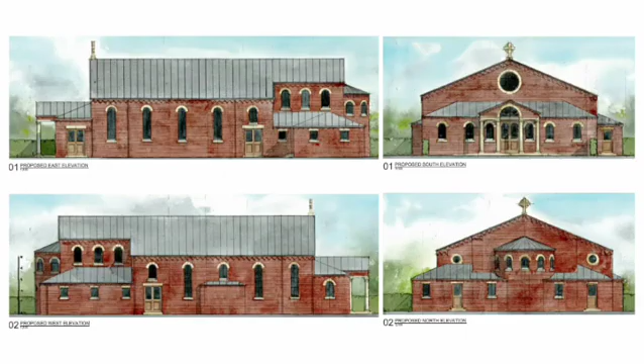Okay, thank you, Father. So I'll start probably with what you all want to know a bit more about, which is what is it that we're actually going to be building. As Father said, we've just got planning permission, so we've spent the last year talking about the options we've got. So what is it that we've arrived at in terms of a decision, and what have we got planning approval for?

You will have seen some images around the place, on websites, and here I think there's some images over there and over there of what we're going to build. But essentially, this is what we've got planning permission for.

A Romanesque church. Essentially, for those who don't know, this field out here is where all this is going to go. So the view you will see from where we're sitting now will essentially be the front face of the church. From the school buildings, so the classrooms and the dormitories, this is the elevation you'll see on the Harts Lane side, and then the rear of the church, which will overlook new car parking at the bottom right there.

The style has been chosen for a number of different reasons, sort of costing-wise. Obviously, we'd love to have gone with a Gothic, very English-style church, but that has cost implications which we weren't able to stretch to. Also, we have to demonstrate we're blending in with existing buildings. Although the brick we'll be going with is unlikely to be exactly the same as the buildings we're in and the buildings adjacent to us, red brick was something we had to use to incorporate with surrounding buildings.

And then we're going with a zinc roof, which is actually a relatively traditional material, so a grey sort of low roof. And then some decorative features around the windows and where the roof meets the walls as well. So a mix between functional, cost-effective, but with some beauty thrown into it as well.

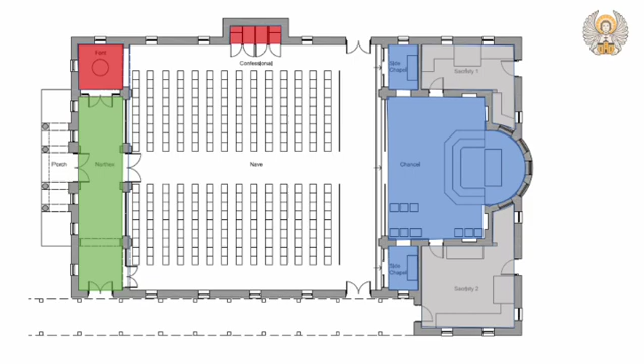And then a narthex, or cry room, as it's more usually referenced to. This will have glazing at the front, so that when you're in there, you have a really good view still of the sanctuary during Mass. It'll be soundproofed when the doors are closed, and obviously we have speakers in there, so you can still hear sermons and things like that.

But yeah, that should be a good space. I think the intention as well is that this shelving and cases are in this space for the repository location, things like that.

And then the nave, so where we'll all be sitting for Mass. Capacity-wise, we're looking at, depending on what's reasonable. It's interesting, you know, when you're thinking about this, you watch how many people squeeze into pews. I think the maximum I've seen is 8 in a pew of 3 meters, so it's quite impressive.

Hopefully we won't have to be squeezing into the pews quite as much, but if we did, we could potentially have a capacity of up to 320 people in just the nave, but more comfortably, it's more realistic that we're looking at a 250 people space. Our current one just references about 150, so we're about 100 more comfortably, but potentially doubling our space if we need to for busy times, confirmations, end of year and things like that.

And then finally, the choir loft. So we will have a choir loft that will sit above there. If you put seating in it, it would cater for about another 30 people, but obviously most of the time it will be used by the choir.

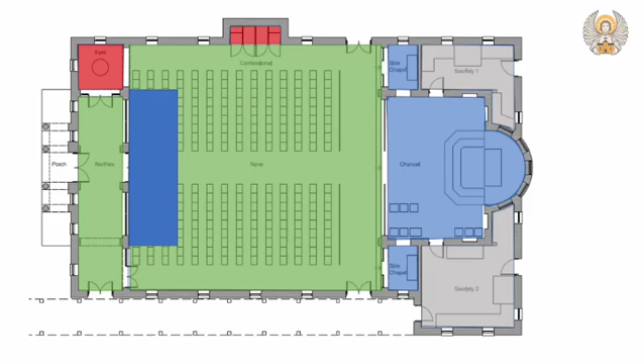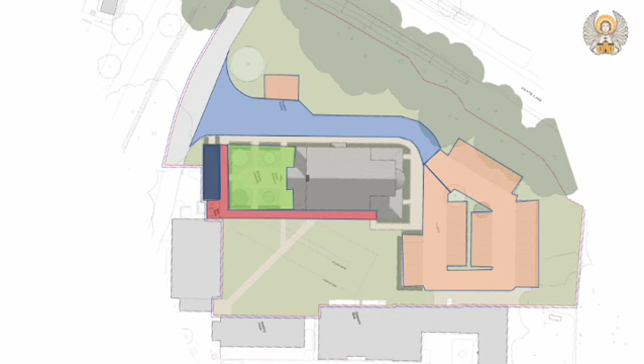And then we will have a nice formal garden in the front. And that won't just get forgotten about because it's a planning condition, so it will go in. We had to demonstrate biodiversity net gain for planning purposes. So that basically means any grass we were digging up, any trees we were taking out to develop this, we had to basically reinstate to improve the area.

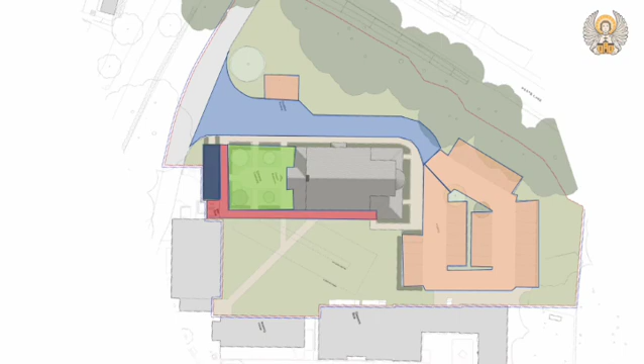So that's included a lot of native species of fruit trees and things that will go in there, and some other planting that will go around, hedgerows and things. So it will be a nice landscaped area as well as the buildings themselves. So that's what we've got at the moment. But how did we end up there?

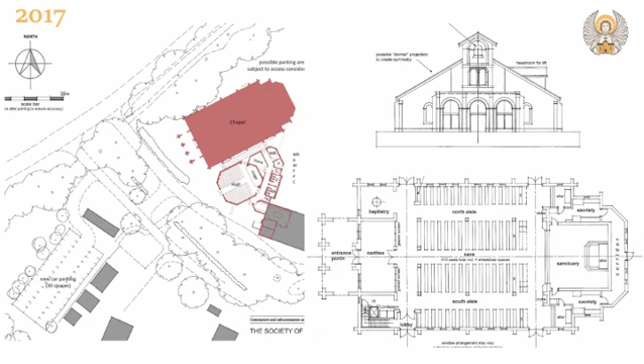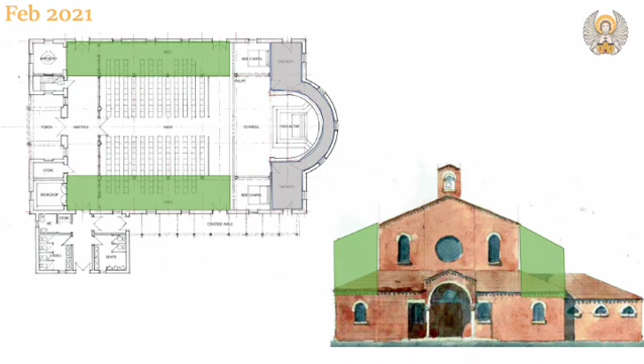By May last year they made those adjustments—you can see now a single pitch roof and a much larger sacristy. They were still trying to push the link corridor, which again is really good design and very useful, but it was an expense we just couldn't afford at this time.

The other noticeably different thing here is the toilets. I mentioned the toilets aren't in this location in the scheme we've gone to planning with. We would have loved the toilets there, but because of its location, the toilet block essentially becomes part of the church's elevation—from this side, it's part of what you see as the church. So it had to be in keeping, the same materials, the same roof, which for a toilet block meant it was quite a costly building, even though it's quite small.

So we said, if we move that building slightly further away from the church, we can make it much more simple, and it won't be as costly. So we got rid of that from that location. This is the scheme that we went for pre-application submission on.

For those who might not already know, before you submit the full application, you submit a tester - a bit of information to the local authority asking what they think our chances of getting planning permission are. So this is the scheme we did that with.

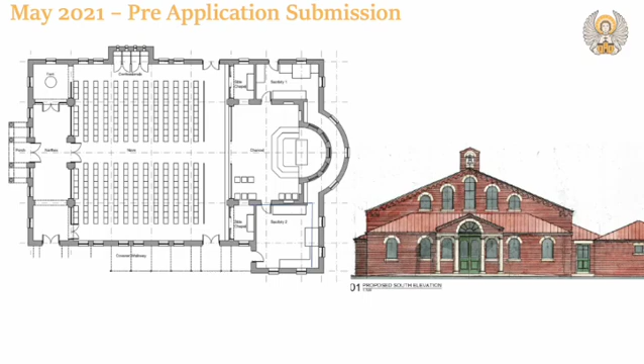We also, for those who are really local, you might have got some flyers through your door - we leafleted every house in the village to say, look, we're doing this, if you want to talk about it, come and speak to us. We also went to the parish council and had a meeting with them and presented our plans. In all cases, pretty much, it was well received.

I think the response from the local authority to the pre-app was, we consider this unlikely to cause harm, which is as close to 'go ahead' as you get from them, really. So that was good. They also gave us a heads up on the types of surveys they wanted to see from us in order to approve it. So that was a milestone back last year - it was a good bit of progress.

So then when we'd got our pre-app response, and had some good response locally, we were buoyed by that and excited - we wanted to kind of crack on. We still had money hanging over us, so the whole time we were doing these design iterations, we were getting prices checked on everything to see where it sits in terms of budget. At that particular point in the project, it was still over the amount of money we wanted to spend.

So this was our 6th iteration of the church, and as you can see, compared to the previous ones, it's a lot shorter. We were working at that time on a budget of £2 million for the whole thing. Through the pre-app we'd had identification from them about ecological things we had to do that were going to cost more money. So we said, right, what is it that we can build for that £2 million? This is basically what it was - a church that we could afford to spend £2 million on. It would have enabled us to squeeze just about 240 people in, but it would have been a squeeze.

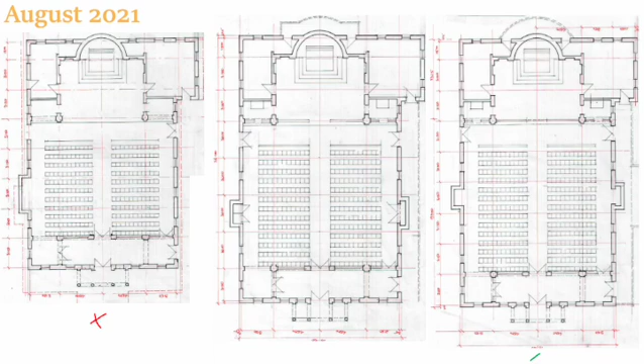You've probably seen these images on the website. We submitted the planning application in October. We were bracing ourselves - the architect and a lot of the consultants we were working with had horror stories of planning applications at schools taking 18 months. So we fully expected to be sitting on our thumbs for a while as we waited to hear back from them. But actually, we were really lucky.

I think all the prayers to St. Joseph and St. Philomena really paid off at this point, and we actually got planning approval in January. Now, we already knew pretty much before Christmas that we were going to get planning permission - we got a written response back from the planning officer basically saying he was going to recommend it for approval. So that was a really good way to go into Christmas, knowing that was coming.

I think we were really lucky. There was a brand new planning officer, so the guy actually deciding on this was brand new to the council, and I think he was quite keen to impress his boss. So he jumped on it very quickly and was very open in discussions with us about what he wanted to see, what he wanted to know.

But essentially, this is what we're building. You can see the car parking at the back, the new access road, the new toilet facilities, the walkway, and the nice trees in front. I don't think there'll be quite as many trees in front there, but that's the artistic rendering.

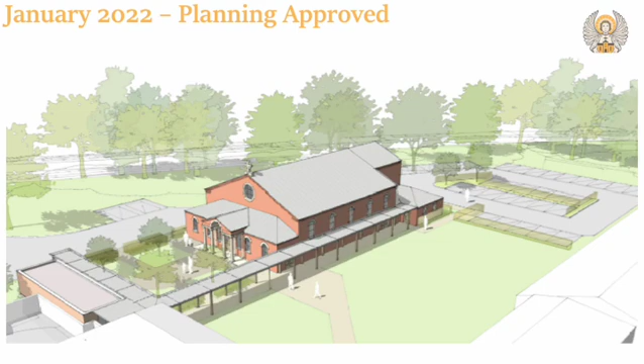So that's essentially where we are at the moment. Obviously those are just a few images, but there's a lot more that goes on behind the scenes, and I thought it'd be interesting to talk to you a little bit more about the architect we're working with, because he's a fascinating chap working within a great organisation.

As I mentioned before, we took on some designs that had been done in 2017. The company who did those designs had been bought out by another company, which is Morse Webb. We could have just carried on working with them, but we really wanted to make sure we were getting value for money, and we thought none of us - Father John and myself, and I don't think Father Robert either - had been involved in the project back in 2017.

Why these guys stood out is that they realised, whilst they had a lot of experience with schoolwork and a reasonable amount of experience working on old churches and restoration of churches, they hadn't done a project like this before - they'd never built a new church. So I think they have a pre-existing arrangement with a guy called Julian Bicknell, who does have a lot of experience with this type of project.

He's written 3 or 4 books about the history of church architecture. He's Anglican, not Catholic, but he immersed himself in everything to do with the traditional liturgy to understand how the church needed to function. So these are some examples - I think this is a church at either Cambridge or Oxford that he previously did. When we interviewed them, we were very, very impressed, and we thought this is the guy who's going to get this right for us.

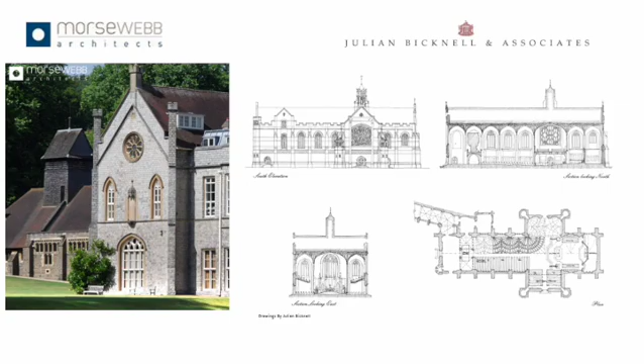These are just some of the images, to give you a flavour of some of the stuff that goes on in the background.

I mentioned his work in planning out the ceremony. You can probably just see that these are individual priests or servers, and there must be 500 of these little images planning out various different ceremonies, so he made sure it was all right.

And these are some of the images of him giving us ideas of how the roof would look. We're not going with that, by the way. It's going to be a much more traditional arrangement. But you can see the skill.

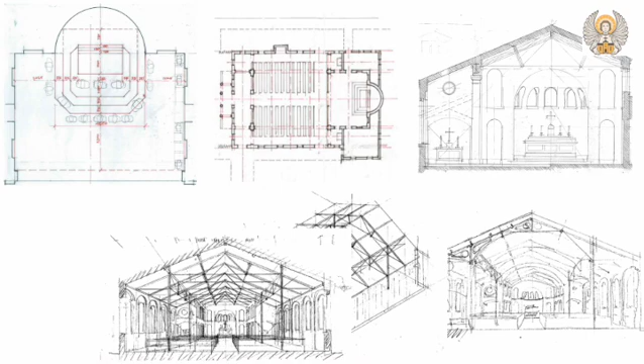These are all hand drawn, and these are some of the other options that he presented to us in terms of the way the interior of the church will work. Just a fantastic designer, so you've got the different choices.

So the one we've gone with is down below. But we also discussed columns throughout the church, shown top left, or a colonnade, an arcade form there. This would be right back at that first design when we had the aisles down either side. These columns and arches would have separated the aisle, which would have been absolutely fantastic.

But yeah, the cost was discussed between Father Robert and myself.

And I was lucky, I stayed both in France and then in America, visiting a lot of churches, some of them freshly built. So we were able to obtain their plans, in particular from Veneta. We got all the plans, all the footprint, from the church of Veneta, which was exceptionally well designed in terms of use.

So we based the design of the chancel, or the sanctuary, and the spacing between the altar, the steps, and then the far wall, on what we were experienced with in other churches.

And one thing about colonnades, they're fantastic, but you lose 10 spaces in your church, and it blocks a lot of line of sight, because that was an intention — and sound as well. Everywhere, from any point in the church, you'll be able to see what's going on in the sanctuary. So that was important.

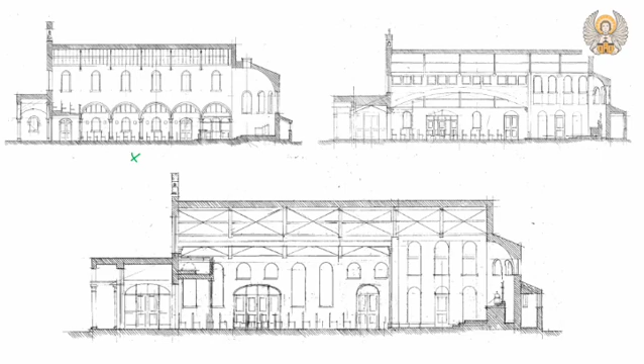And then these, again, I think these images are up somewhere, but these are actually watercolours. I think it just emphasises the skill of the guy we're working with, Julian Bicknell — hand drawn and watercolour finish. Very beautiful. This is part of what we submitted for planning, so it gives you an idea of what it would look like inside.

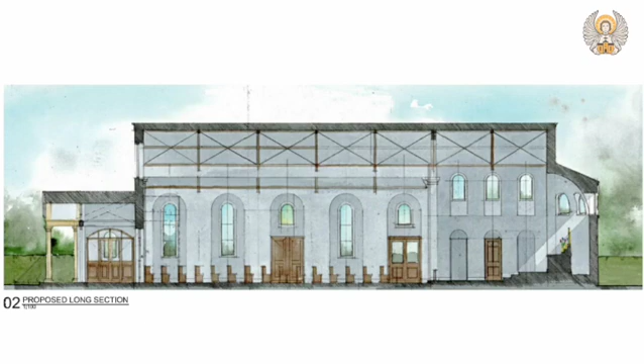So cost-wise, I mentioned cost a few times, so I thought it'd be interesting to break that down a little bit. I can share these slides with anyone who wants to look at this in more detail — there are some more detailed breakdowns. They'll go onto the website.

As I said, the plans that we submitted for planning, we priced, and it came back — we got priced for everything at £2.73 million. So it is more than we originally had budgeted for, but it is taking the opportunity, making the most of this church, and making sure it has a future beyond just a couple of years, as things grow with larger parish events.

That have come together, or are still coming together, to build and design the church, and make sure it doesn't fall down. There's also risk — if we are very careful, and the very good client doesn't change their mind at all between now and completion, we will save that money. So we do everything we can to make sure there's a buffer between what it actually will cost to build the church and the risks of things happening, but hopefully we can retain some of that money and not spend it.

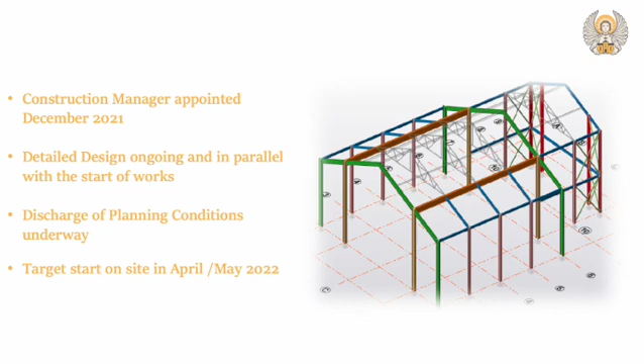The great thing about the construction management approach is you can start that construction work while you're still doing elements of design for the internal finishes that will come much later on. And we anticipate a year's worth of construction. So if all goes to plan, we'll have a working church that we can celebrate the end of the school year in 2023 in.

Just to reassure everyone, there'll be tight control over segregation of work. The whole site will be fenced off and managed so that school children can't wander in there or fall into any holes in the site.

The intention is that drop off and pick up as it operates at the moment will continue exactly as it does. So deliveries - the program of deliveries and things will have to work around that rather than the other way around. And we will try, and we've already started talking to the contractor about wanting to make the most of the fact that we're doing this,

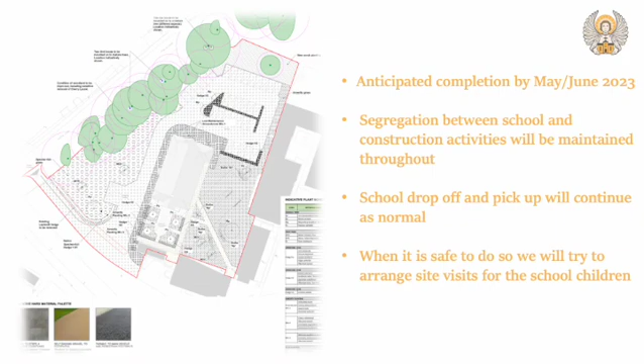having visits for small groups of school children at appropriate times so we can show them how the construction works. And yeah, so that should be good. More information hopefully about that will be forthcoming. And that's it.